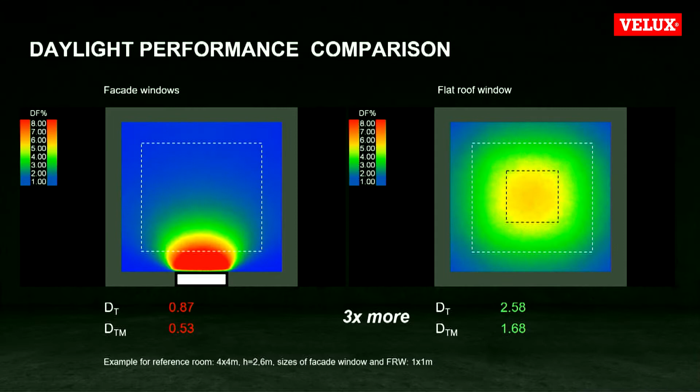We know that daylight is an essential part of any type of architecture. Therefore, we as architects really have to be clever how we deliver daylight to the rooms. The facade window will never provide as much daylight as a roof opening, because the top light is much stronger. We can prove that via calculations, shown in the picture, that within the same room with the same size facade window and roof light, you can see the huge difference in the daylight factor provided by those two different openings.

We saw the calculation, but what does it mean for a real apartment? We really need to focus in a real apartment on the activities we need to do - dining, cooking, eating, reading. We need to provide daylight to the place where we are using it. We need to focus really on these special places.

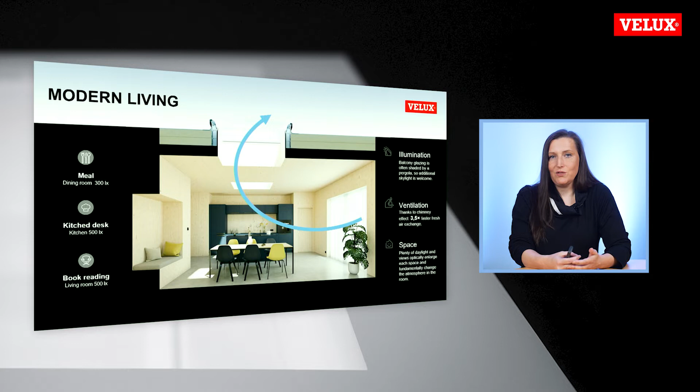But not only daylight - fresh air is also important. If we use this roof opening for ventilation, the stack effect helps us achieve air exchange 3.5 times quicker. And of course, we can enlarge the space via this view out to the sky or the surroundings.

Design is not everything necessary for the building. We also produce really superb indoor comfort. And this is not only the energy performance of those products, but also excellent sound reduction which those products have. All of our vented products, but also the accessories, can be automated to create a perfect indoor climate in your projects.

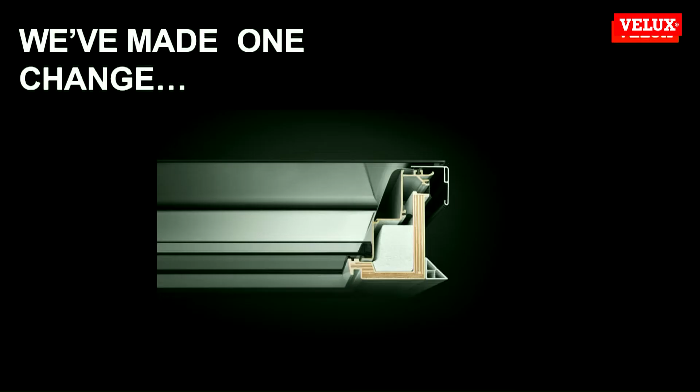So how did we do it? We made one small change - we changed everything. You see, we have a new glass-to-edge top unit. We have an invisible, really thin glass fiber sash.

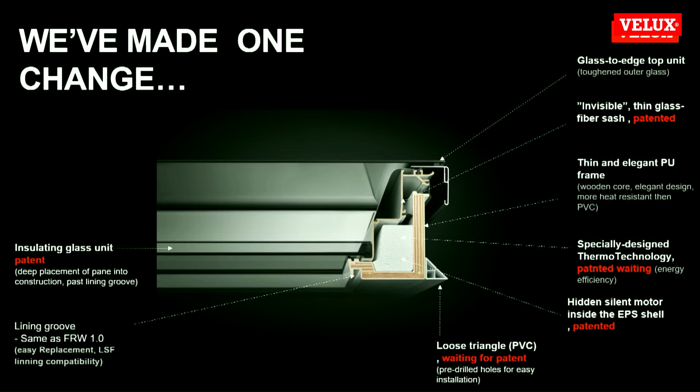We have a polyurethane frame with a wooden core. We have special thermo-technology with a hidden silent motor. We have all the accessories which make installation much easier. And we also have insulating glass units which we can offer in double but also triple glazing. All the profiles are really designed for this minimalistic approach.

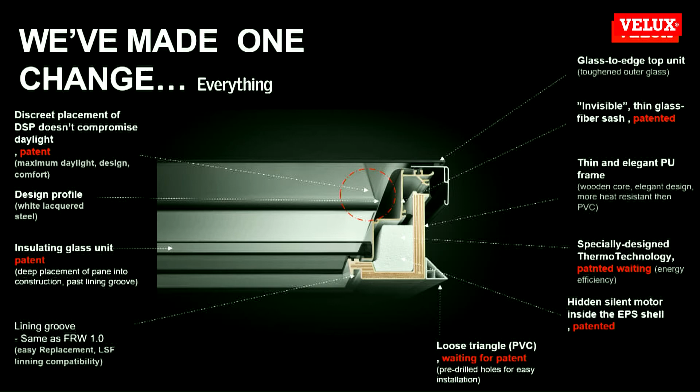So, a beautiful product which completes our flat roof window portfolio. I would like to quickly go through the portfolio to show you that we have products for any type of your projects. We start with the basic dome, which is used for uninhabited buildings, for light commercial. We move through to the dome with glazing, a product you already know and which we had in our portfolio before. And we have two newcomers - this design, new generation flat or curved glass roof lights.

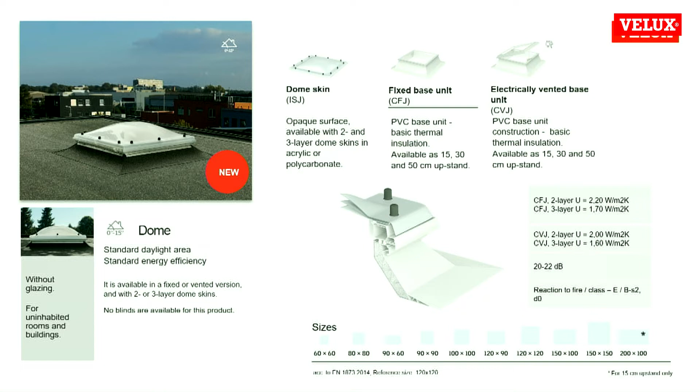Coming closer to those products, starting with the basic dome. We offer it with a fixed base unit or vented base unit, and on top of this base unit an opaque surface is used - opaque dome, which can be double or triple skin. You can see we offer a really wide scale of sizes, from 60 by 60 centimeters to 2 meters by 1 meter. This is the standard product, and within this standard product we do not offer any accessories, blinds, or shutters.

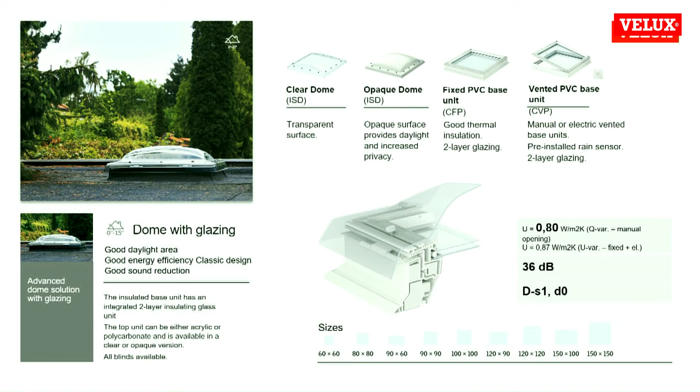If we move to a slightly higher category, we come to the dome with glazing. This product, again, is sustained from a vented or fixed base unit made from PVC, and you can choose from an opaque or clear dome. The base unit is provided with double glazing. As this product tends to be used in residential or office buildings, we offer some heat protection and daylight control accessories - we're talking about anti-heat blind, but also blackout blind or semi-soft lighting blind, which can produce some diffuse light into the building.

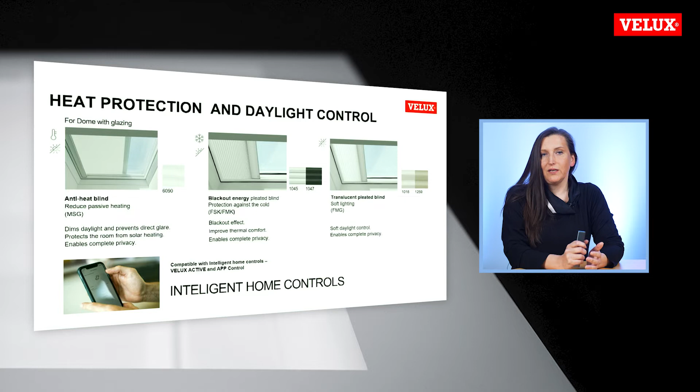As this product has to be used in residential offices and schools, we need to provide sun protection but also daylight control. Therefore, we offer anti-heat blind, blackout blind, but also soft lighting blind. All these blinds are remotely operated, and together with this vented base unit, you can include them into VELUX Active or app control or any type of smart home system.

We have here this red dot design winner, the flat glass roof light. Here we can see that the product has maximum daylight area, excellent energy performance with a U value like 0.6, really great design, and excellent sound reduction at the level of 39 decibels.

The system works with two bases, a vented base and a fixed base, and this flat glass top. Within that, we can offer 2 or 3 layer glazing units. I'll also draw your attention to the sizes, because even with the glazed unit, we can offer sizes up to 2 by 1 meter, which will be available on our markets from September.

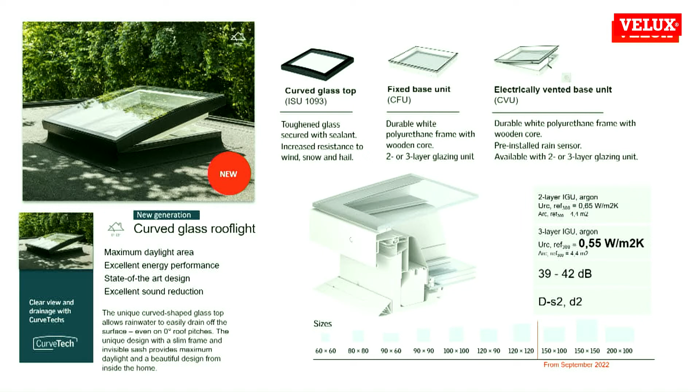What is really great here is that we have a product for design spaces, designed houses, and these products are also provided with accessories.

Again here, all the accessories and all the vented base units can be operated by VELUX Active or app control.

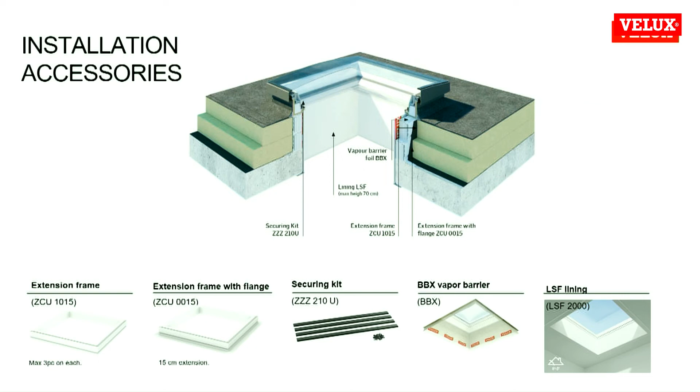Talking about installation, this is a very important part of satisfaction with the product as it is. We offer quite a load of accessories to ensure easy and safe installation of our products to flat roofs.

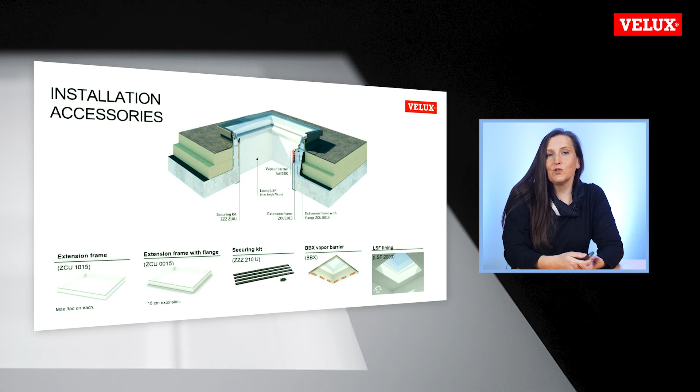Within constructions where the insulation is above the bearing construction, we offer extension frames where we can go even up to 70 centimeters to lift the product above this insulation layer. We offer securing kits to secure the roofing felt to fit the product, and a very important part is the system vapor barrier, which is specifically designed for each product to secure the perfect installation. We also have the system lining, which you can use in your projects.

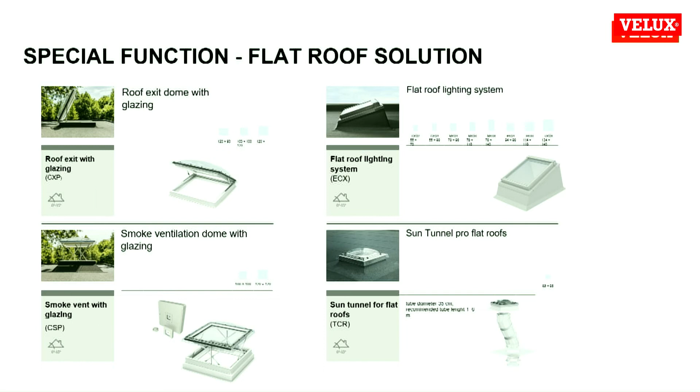Not only standard products, but also special functions sometimes have to be included in projects. We're talking about roof exits, smoke ventilation systems, but also sun tunnels. A full overview of these special functions you will find on our web pages.

To make a very quick product portfolio summary of technical values, as you already heard, we are starting with the basic dome, which starts at a U value of 2.2, and running through our portfolio up to 0.55, which is really an outstanding value for this product category. The decibel reduction we can provide starts at a level of 20 decibels and runs even up to 42. Then you can really easily choose the type of product which fits the type of your project.

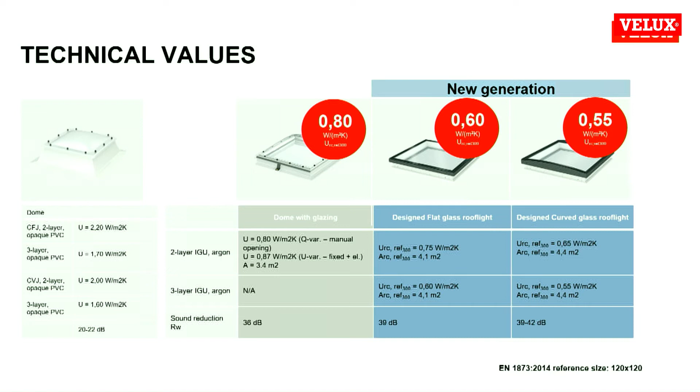Overview of sizes also gives you an idea that we offer the system sizes starting from 60 by 60, ending up with the 2 meters by 1 meter, which really provides great daylight solutions for your projects.

If I would like to sum up, talking about family houses where our products usually end up: usually we use the top light in the kitchen, in corridors, and in bathrooms.

Talking about daylight and daylight design, sometimes we need tools to help us make the design better. Here we are offering a tool which is possible to download for free from our web pages, called Daylight Visualizer.

Daylight Visualizer offers us loads of different outcomes. One of these can be a sunlight animation with really great 3D visualization of your space, where you can see how the light comes into the depth of the building.

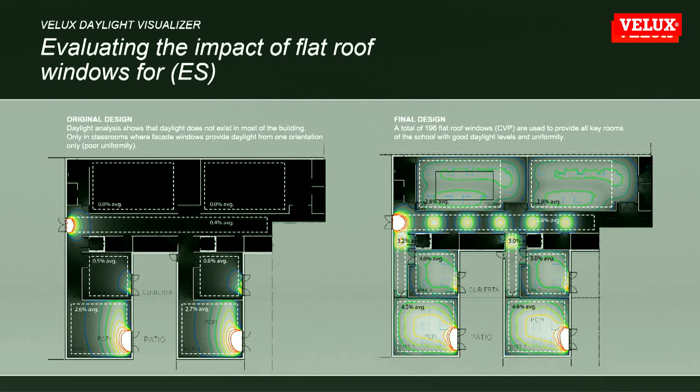You see that these top roof lights really deliver enough daylight to fulfill the standard need of the daylight factor. And in reality, the artistic part also has to be considered - with the play of light and of the roof and facade openings, you can really provide enough design for the roof.

So, more or less at the end of the first part of our presentation for today, I would like to highlight our digital tools. As mentioned, the Daylight Visualizer. We also offer the Energy and Indoor Climate Visualizer, a tool which helps us create good indoor climate - you can calculate how much energy you save for cooling if you're using external shadings, for example, and so on.

And all the products I showed you today, you can download as a BIM object or 2D drawing for your project.

And now I'm making a small spoiler - I would like to switch to my colleague in the workroom, where you will see our products we talked about in real life, and he will talk a bit more about the installation, and also about home automation. Thank you for listening.